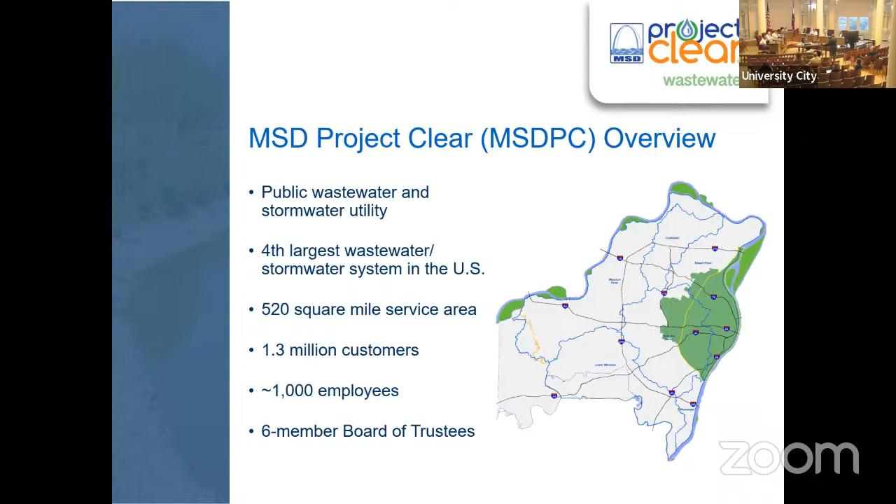This is one of the last two mega projects we have to build associated with our consent decree. This dates back to 2007-2009, when the long-term control plan was put together. That plan involved the communities and helped them decide on the solution going forward. There was large outreach, meetings all over the area, and they got input on balancing spend with impacts to the environment. That's how we came up with the consent decree and the combined sewer components. This project is scheduled to be completed by 2039. Some faces in this room may change by then, but we want to get the plan out by the end of the year and lay that out for everyone so they know where we're headed.

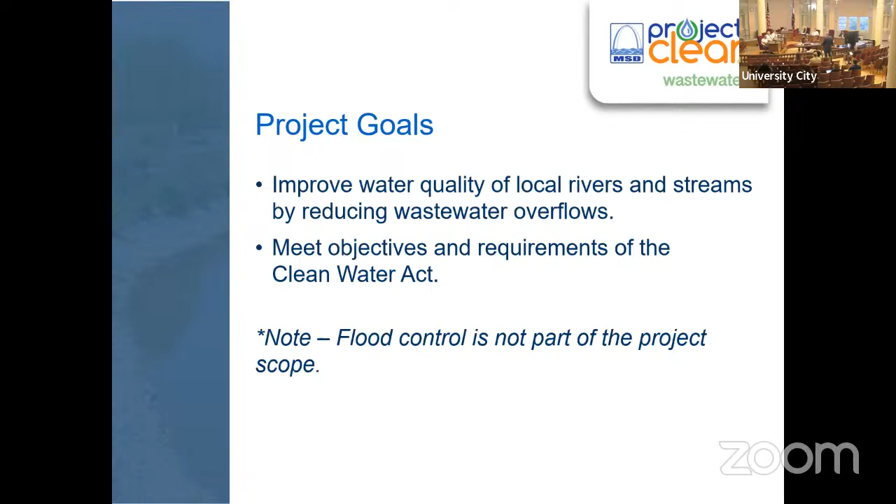So what is a combined sewer overflow? Again, what is the problem? As Brad said, it's not really a problem - it's just the way the city was developed, the evolution of the city, starting here and heading east into the city of St. Louis. A combined sewer system collects both rainwater and wastewater into one pipe. During dry periods, no issues - that just heads off to the wastewater treatment plant for treatment. When you get heavy rainstorms, the amount of stormwater runoff can overtax the system, so you get too much flow going into the pipe, and then it discharges out into the river. That is how we define a combined sewer overflow event - when there's too much stormwater that mixes with the wastewater and it discharges out into a permitted CSO location or diversion structure.

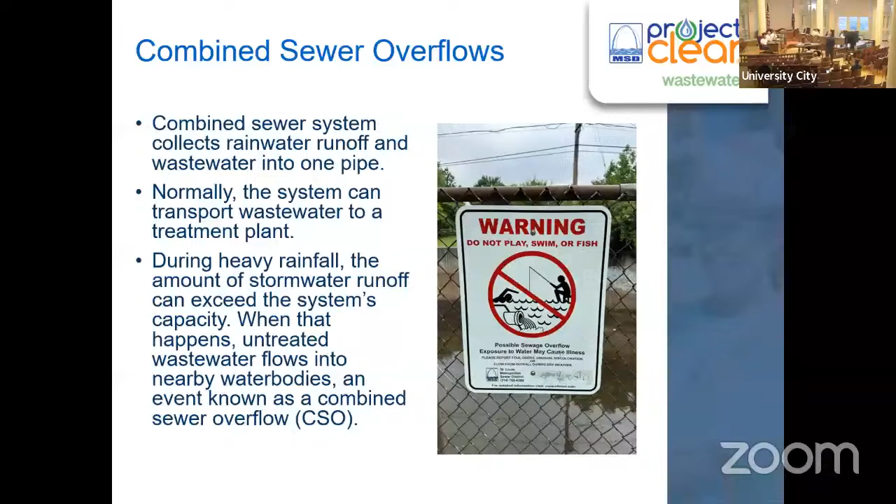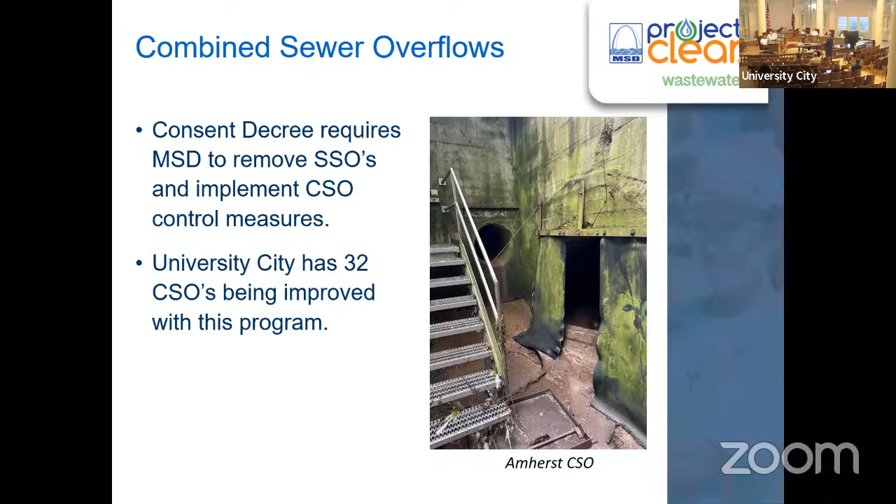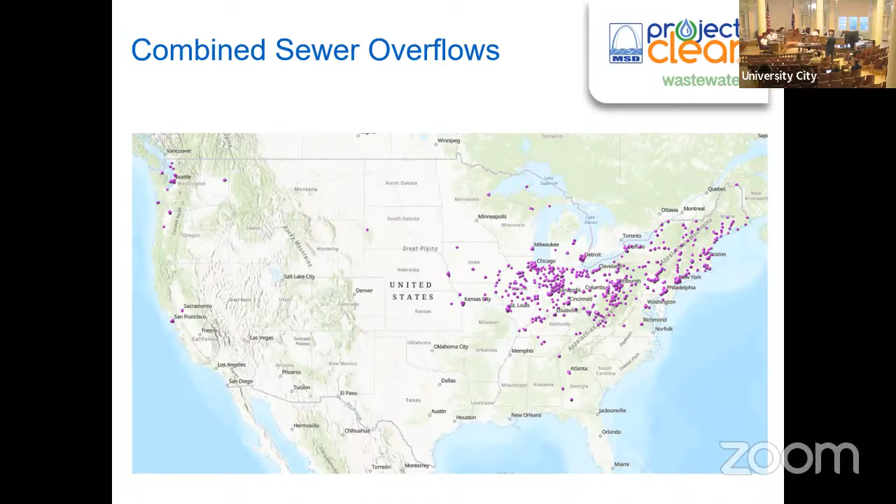So it's not just University City, this project. There are several municipalities involved, and we'll see that as we go through a bigger map here.

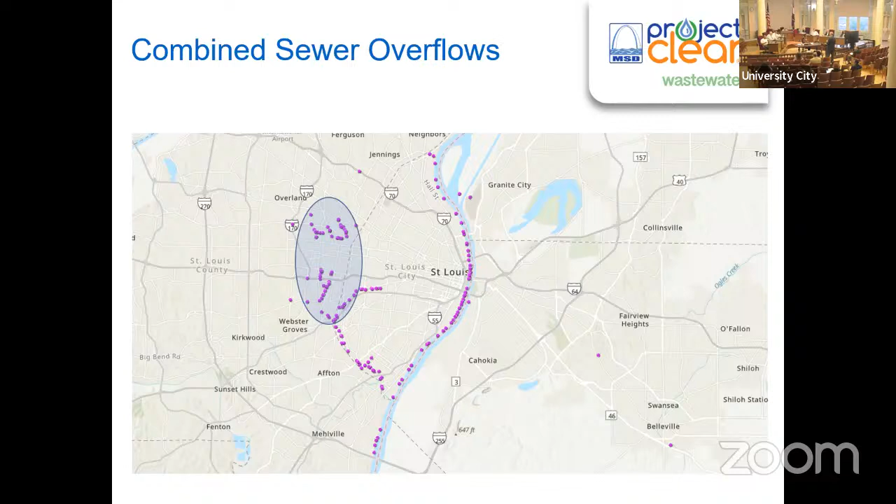That's what we're trying to improve upon here.

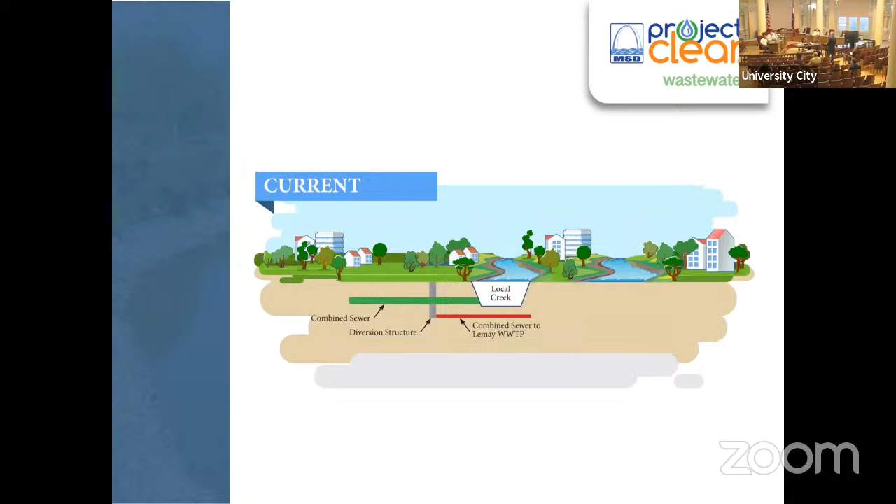So the solution is a deep storage tunnel, a dewatering pump station down in the Shrewsbury area, and there's going to be several near surface sewers. As you can imagine, this tunnel is long and linear. It's a couple hundred feet underground. It's kind of out of sight, out of mind.

But all of these combined sewer overflow locations that are permitted are all up and down Upper River des Peres. So the near surface sewers are going to get all of that wastewater to the tunnel itself. These improvements directly benefit water quality in Upper River des Peres tributaries such as Black Creek, Deer Creek, Hampton, Claytonia Creeks, as you keep heading south down towards Shrewsbury. Just a note there that there's multiple municipalities involved, which you'll see on the next slide.

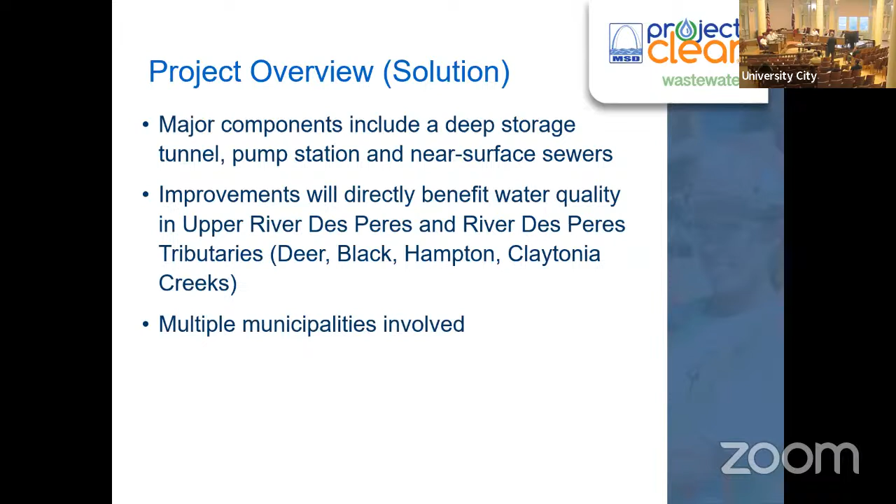Okay, so alignment considerations. I was thinking the map was here already. So when we laid the tunnel out, we're trying to take advantage of as much public right of way as possible. The tunnel is 90 to 240 feet deep, depending upon where you are along the corridor.

Focused underneath public right of ways, minimize how many easements we need, how many potential impacted parcels, private residents we have.

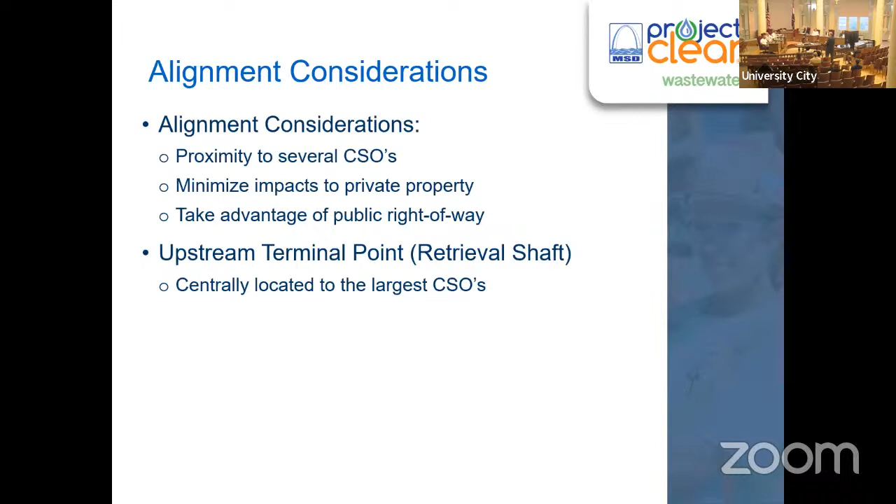And really what we're focused on as far as the tunnel alignment goes is it's centrally located to the largest combined sewer overflows. There's some within University City you'll see on the map that are larger than others. They contribute more to the problem than others. So we really wanted to focus our tunnel alignment on that. It's kind of a combination of minimizing disturbance to private residents, staying under right of way, but also focusing on getting the biggest CSOs tied to the system.

So the project map, you guys should have a handout of that in front of you. We printed some larger ones off just to make that easier to see. But you can see the main tunnel alignment, the orange line, the thick orange line, starts down by Interstate 44 in the City of St. Louis. That's where our dewatering pump station will be.

It heads up north, eventually picking up underneath Big Bend Boulevard and heading due north into University City, cuts over to Olive Boulevard, which is more public right of way, and eventually heads up towards Heman Park or just west of Heman Park. The black dots on that map signify our major tunnel shafts.

So down at the downstream end, you have the dewatering pump station shaft. That's where the project would likely start. They head from a downstream end to an upstream end as they're constructing this. The dot at Big Bend and 64 is an intermediate shaft. And then the northernmost black circle is the retrieval shaft, where they'll take the tunnel boring machine out of the ground when it's finished doing its job of excavating the earth or the rock.

The other thing I want to point out on the map is we did classify the CSOs from a volume standpoint. So the big red ones are the largest ones; they contribute the most flow into Upper River des Peres. The yellow ones we call medium-sized or moderate. And then all the green ones you see were classified as lower volume type CSOs.

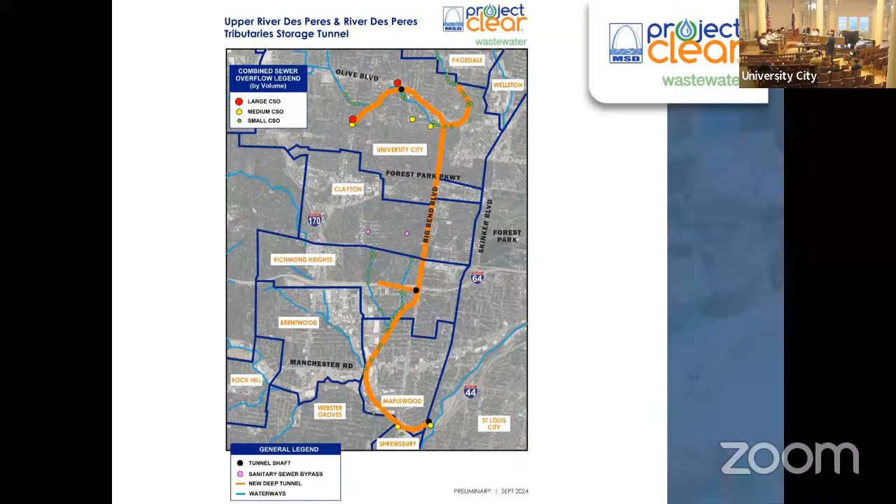You see all the different municipalities that we go through: Maplewood, Richmond Heights, Clayton, U City, touches Pagedale, Shrewsbury, and the city of St. Louis as well.

A few facts about the tunnel: it's about 18-foot diameter on the inside. It'll be bigger once we bore it, and then there's a lining that goes inside of it. It's about 6 miles long from south to north, and it ranges anywhere from 90 feet to 240 feet deep depending upon where you are on the corridor, because the corridor is not flat—it's going up and down at the ground surface.

There's approximately 16 drop shafts. Part of the solution is near surface sewers that get the combined sewer wastewater over to the tunnel, and then it drops down in a shaft. There are about 16 of those along the corridor.

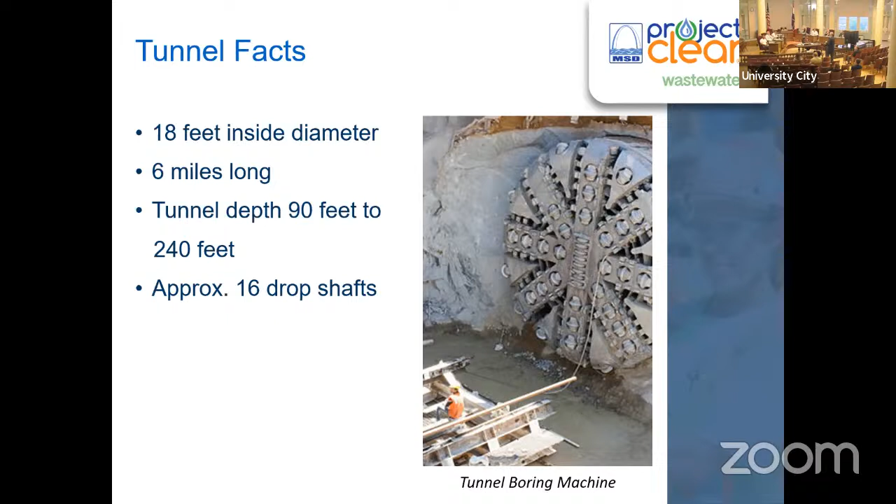So the components in University City—how does this impact the city? Obviously, the tunnel is deep underground in the city. The retrieval shaft is in U City because that is the northernmost, largest CSO that the program is trying to improve upon. There are tunnel intakes that get the combined sewer wastewater into the tunnel, and then there are near surface sewers that we will be constructing to tie all that together as a complete program.

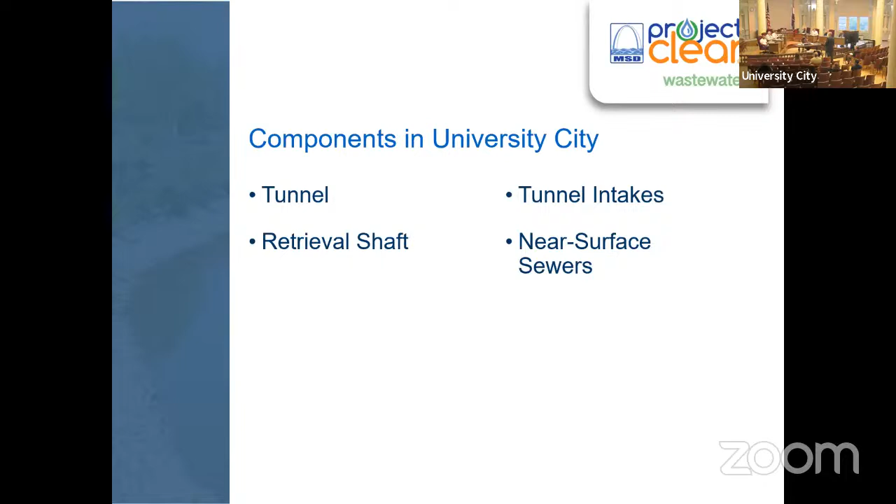Here's a proposed cartoon schematic that looks pretty similar to the existing one we showed previously. You'll see the tunnel down low, the retrieval shaft on the left-hand side of the exhibit, and what happens in the middle is the improvement at every intake location—16 points along the corridor. The middle part of this cartoon is the improvement of the program.

So when combined sewage, shown in green, during dry periods, it just goes down into the red sewer like before, and heads over to the wastewater treatment plant. During times of wet weather, where you have the combined stormwater and wastewater, instead of it heading out to the local creek—shown as a dashed green line—it'll head down into a drop shaft or intake structure and go into the tunnel. The tunnel will store this until the wastewater treatment plant can process it, and then we're going to pump it up to the surface and it'll go underneath the 84-inch foul water interceptors under the river to the wastewater treatment plant.

So 16 times along the alignment, that middle part is the improvement. Instead of going out to the creek, it's going to head down into the tunnel for storage, and then MSD is going to treat it. So we're drastically going to improve the water quality of Upper River des Peres with this solution.

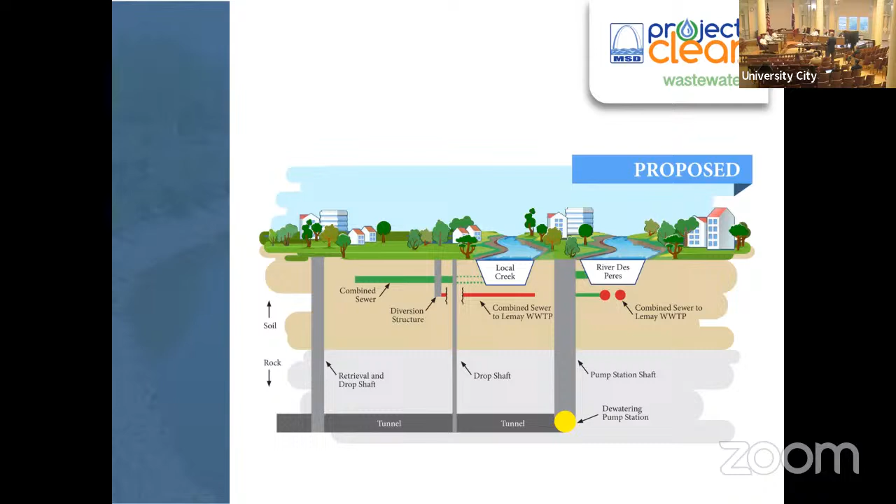A little bit of an enlarged view of University City, showing a few more details here. You'll notice a lot of the same stuff—the orange tunnel is there, along with the two connecting tunnels that branch off of it. One connecting tunnel heads off to the northeast, curving up towards the north at Page, and then you have another connecting tunnel from the retrieval shaft that heads over towards the North and South Road intersection.

What we do show on this map that wasn't on the previous one are the proposed intakes in University City—those are the light blue or cyan squares. They're not completely set yet; engineering-wise, they're located to minimize surface impacts, easements, and stuff like that—they're tentative at the moment. You see the largest CSOs, the two red ones up on the left, and then the yellow ones are the medium-sized ones. Again, our alignments are focused on being near those because they're the heaviest volume producers.

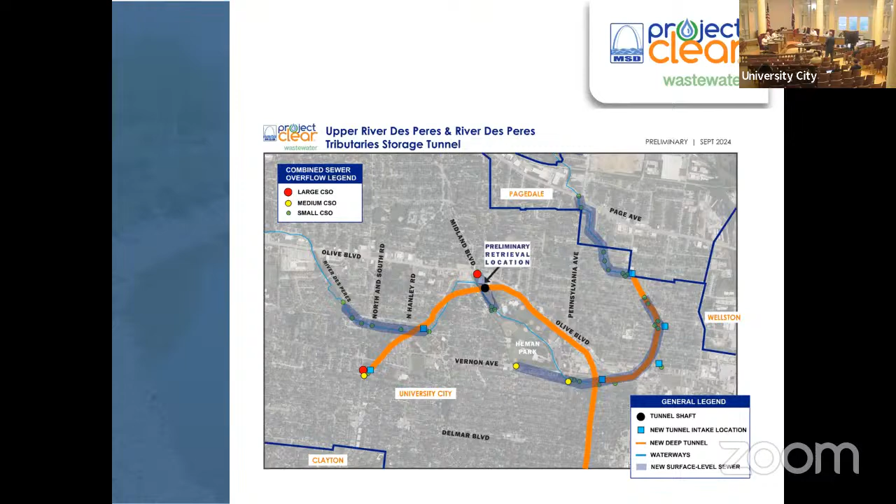The tunnel and near-surface sewer projects should begin construction somewhere around 2031. And per the consent decree, the entire program needs to be up and running—switch flipped to the on position—by 2039.

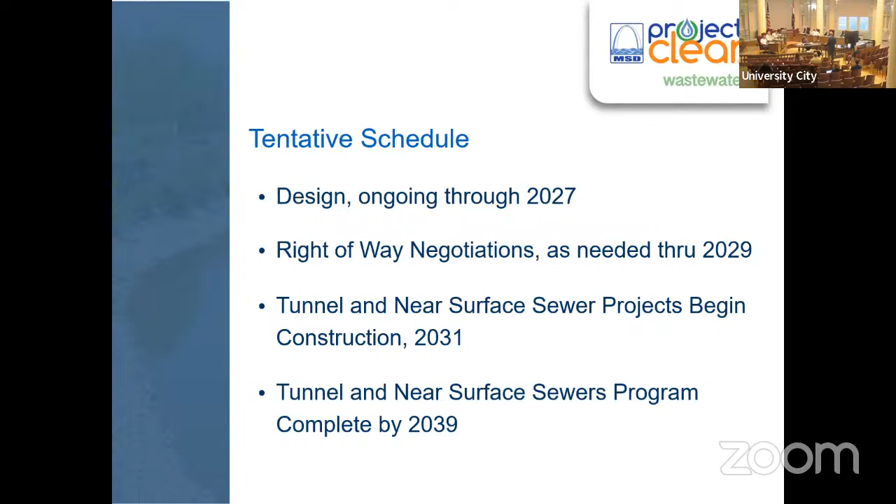Next slide, please. I'm just going to go through a few more current activities before Brad takes it back over.

Geotechnical investigations. I want to thank the city for allowing us and giving us a couple of right of entry permits up by Heman Park. So what we're doing there is taking a lot of deep subsurface borings, somewhere on the order of 225 to 250 feet deep. We're trying to get a gauge on the type of rock below the surface. We want to be in a consistent stratum, which from an engineering point of view is the best thing for the tunnel boring machine. That way you know what you're getting.

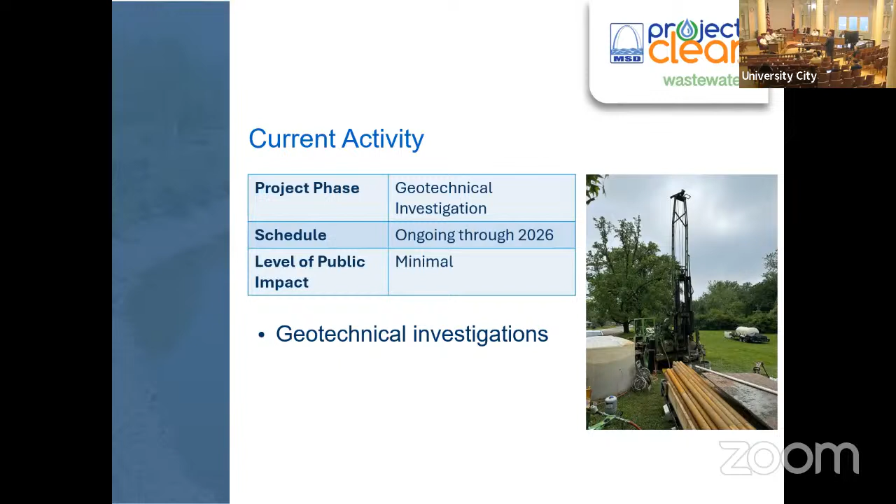Next slide, please. We can see a profile of this. This is a profile of the rock stratum underneath the ground. All the vertical black lines on that exhibit are borings we've previously taken, starting back in 2017. So we've poked a lot of holes in the ground along the corridor to best understand the rock properties that the tunnel boring machine will have to get through. Again, the city has helped us out, so we thank you for that.

We do have a few more borings coming up in fiscal year 25. In fiscal year 26 there may be a few stragglers just to pick up anything we've missed, to minimize risk. Next slide, please.

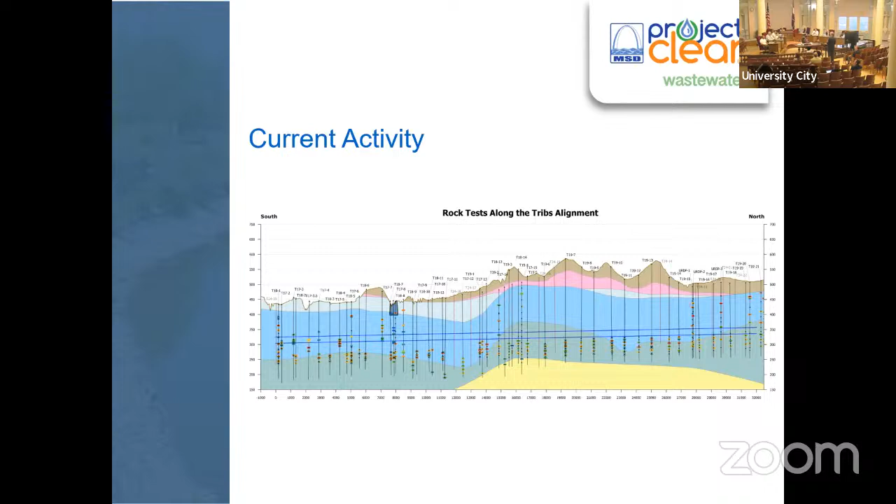And then the pre-design, that's the other real current activity that's ongoing. That's focused on getting the tunnel laid out, the alignment, the intake locations, and getting some of that preliminary design done, such as sizes and flow rates and stuff like that.

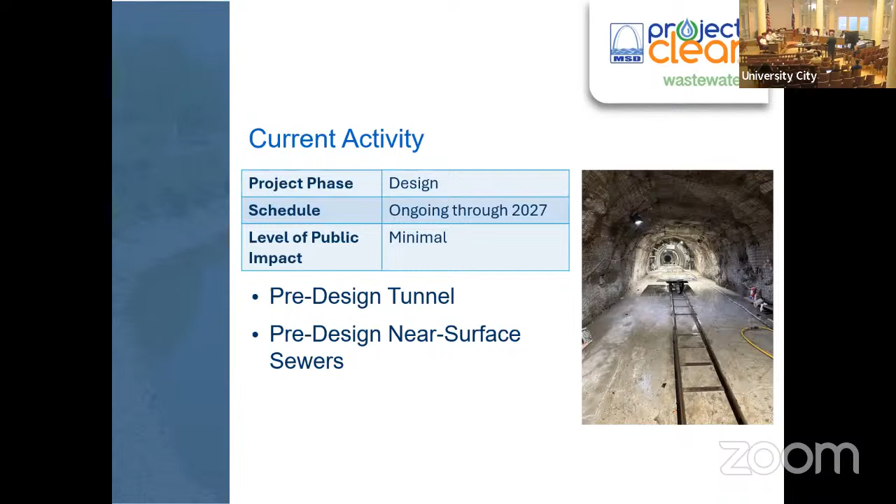Next slide. I think this is where Brad might take back over. So thank you for your attention tonight.

I can tell everyone is now an expert on combined sewer tunnels. The gist of it is all those dots you've seen are places where combined sewage overflows into the creeks and streams, and we need to mitigate those. We need to take care of those.

We've got the large big tunnel that's coming from the south, and then all the fingers that go off into the various areas. One thing we have to get your input on, or we'd like your input on, is where this tunnel ends up.

So he showed that picture of that large machine, that's the tunnel boring machine. It goes in the ground. It's kind of neat, it actually fractures the rock as it goes. It pushes against the sides and pushes forward. Most of the tunnel spoils will be taken out down in Shrewsbury, much farther south. But we have to have a place to take the machine out, and we call it the retrieval shaft.

In this case it serves a dual purpose. We will take the machine out in pieces when we're done with the tunnel, and it also acts as a major intake. We have two sites just to the west of Heman Park that we want to discuss.

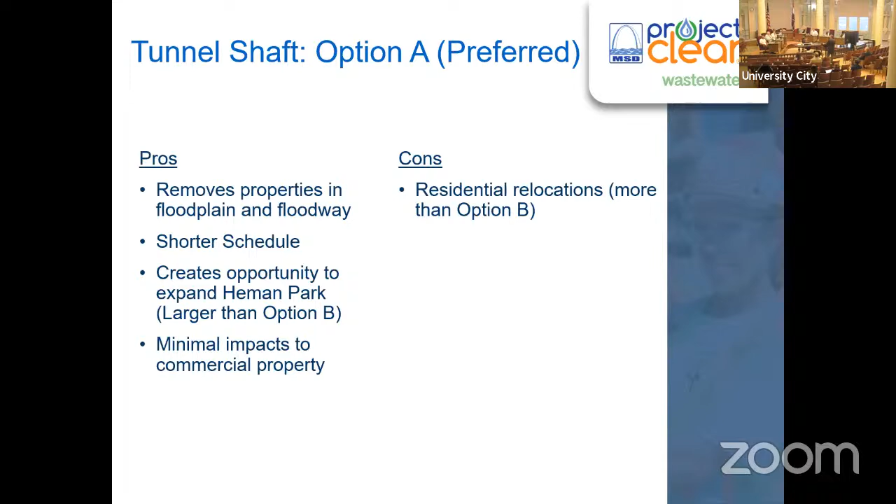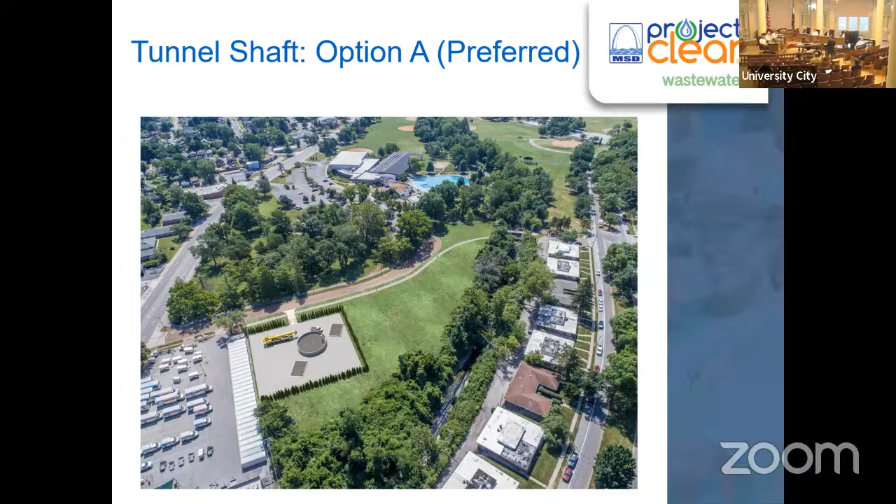The second alternative we wanted to share, option B, utilizes the U-Haul area—the existing U-Haul facility—as well as a portion of the apartments. This is a little bit larger, 4.8 acres, mainly to help us accommodate the sewers that have to come in, which you can see on the exhibit there.

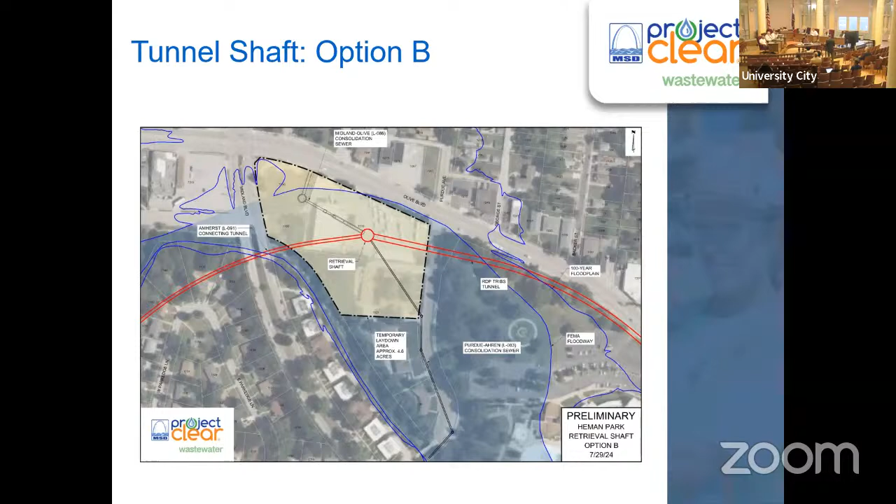Pros and cons again: it removes properties from the floodplain and floodway. It has good construction access right off of Olive. It again creates an opportunity to expand Heman Park, a little bit less than the other option. The cons: it would impact the U-Haul business and the tax base associated with it. Resident relocations are lower, but we want to note that the remaining residents would be next to a large construction site, so we acknowledge that. It is also a slightly longer schedule.

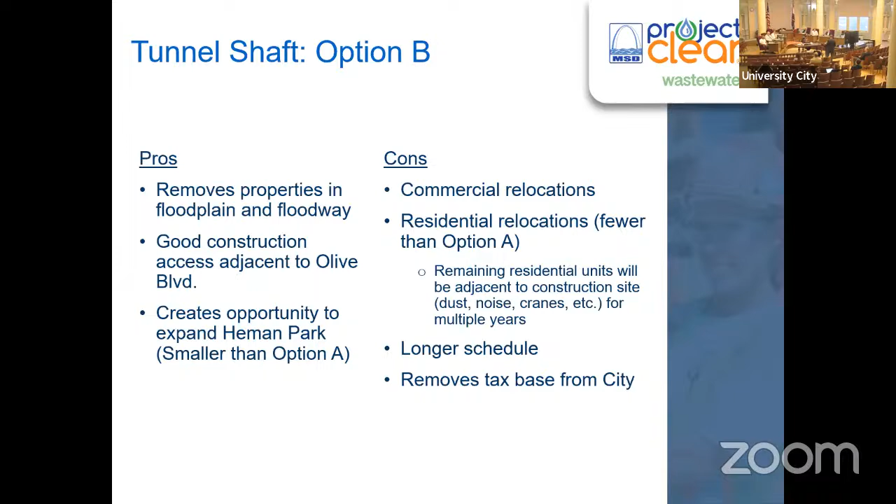This is our second large tunnel that we've built with the program. We called it the Deer Creek Tunnel. It actually ran from down in Shrewsbury along Interstate 44, where we have a pump station site.

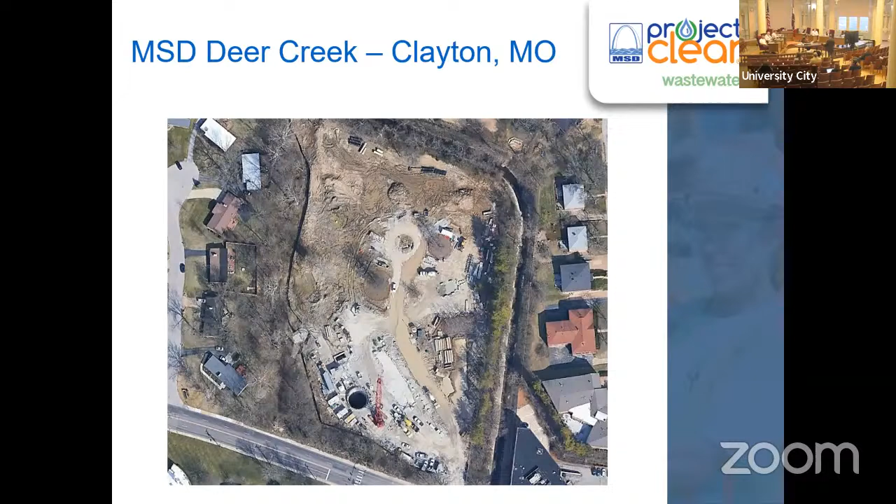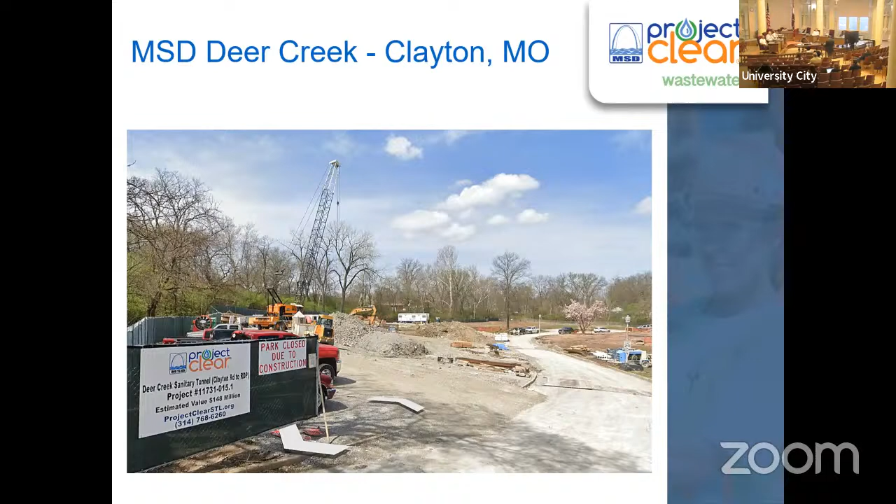This shows a picture during construction—you can see the crane off to the left. The tunnel shaft is up off to the left, and the road was starting to go back in. You can see it's heavy construction. There are residential homes around this site, and we really got very few complaints. The main part of the construction is encompassed right at the park site.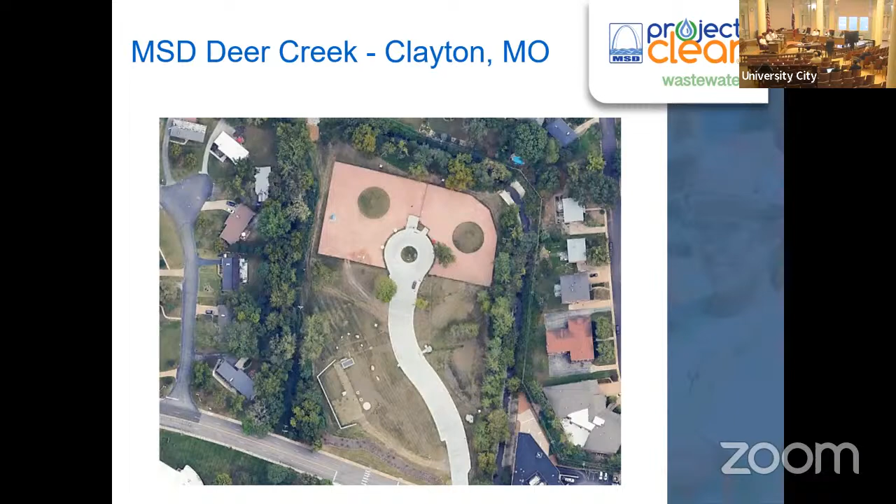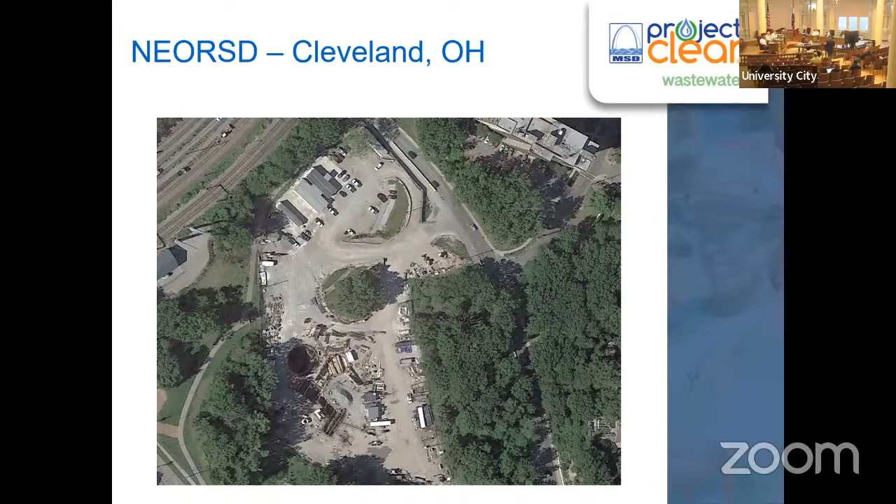This is another example, from the Northeast Ohio Sewer District—another project that Jacobs was associated with. You can see the tunnel shaft site during construction, and then after construction, what it looks like after they returned it back to a park-like setting.

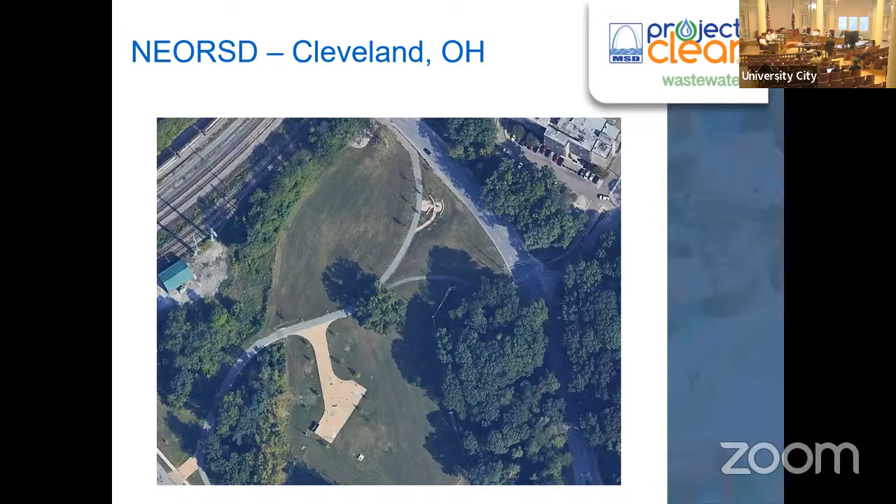Next slide. So everyone's ready for their honorary sewer tunnel degree after this.

We presented this to you kind of quick, and I said we presented originally to the city manager and public works folks. We gathered up questions from that day, and we have answers to each of those. So we'll run through those, and then if you have additional questions, we can address them.

Why is the retrieval shaft in University City? We really got to go where the problems are. The problems are the issues we have to deal with from those combined sewer overflows, and there's a lot of them here in University City area. We've got to get a major conduit up there, somewhere in the middle of these, to adequately convey the flow.

That area that I was showing you, the two options, that's the place that we think is the most logical choice. We spent a lot of time looking at that. He showed all the borings, all the different things we've done. There's a considerable amount of upfront design before we pick that alignment, so a lot of work has gone into that. That's why it's located in University City.

What is the number of residents to be relocated? We don't know the number of residents in each of those units, so we showed units here. Option A is 25 units. Option B is 12 units, including the U-Haul facility. We'll be there for a long amount of time, in the 6 to 8 year range. So it's not only the tunnel going up, but the tunnels coming in, so that site would be used up for a while.

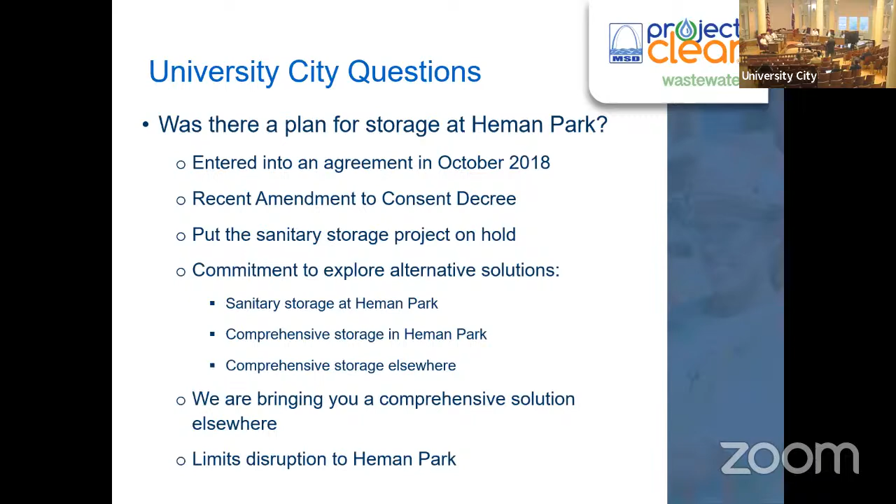What are the water quality standards when the flow hits the creek? We assume you're talking about combined sewer flow hitting the creek. The entire EPA consent decree is all about improving water quality. That's what we're here to do, and this project will dramatically improve water quality. We don't set the water quality standards, that's the state of Missouri, MDNR, and the water quality standard is not going to change. We just know we're going to take a lot of the problems out of those streams.

When will the public outreach start?

So we're here today to update you on the project, talking about those two retrieval shaft locations. Ultimately, we want to get our plan for the entire project, from all the way down at Maplewood up into University City, this entire thing, done by the end of the year. So we'd love if you've got input on those retrieval shafts. That does impact our schedule on how we're going to move forward.

Detailed public outreach, we're going to do that like we do with a lot of projects. As the project goes on and becomes more developed, has more details brought to it, we'll schedule public meetings at that time. Some of these projects, I call them near surface sewers. They're not tunnel projects, they're closer to the surface. We're probably going to break those out and may start on those earlier to get them done, so we're not doing everything at the last minute.